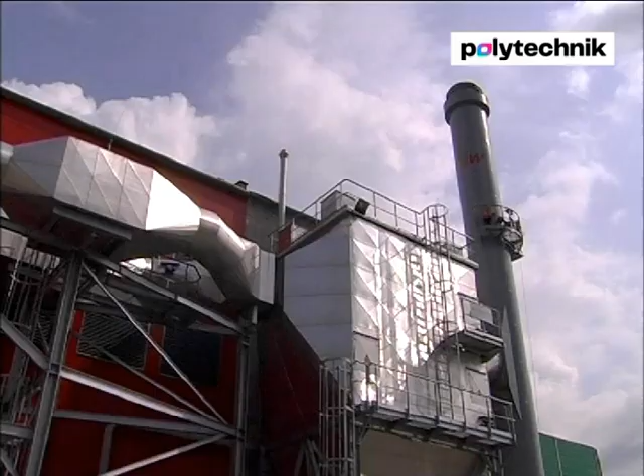Polytechnik has been using heat and electricity from the sun's energy stored in wood for over 40 years. More than 2,500 Polytechnik facilities have proven that it's capable of meeting the spectrum of customer requirements and covering the range of fuels on offer.

These facilities have been constructed within industry as a whole, in the timber industry, municipalities, market gardens and the food industry, among others.

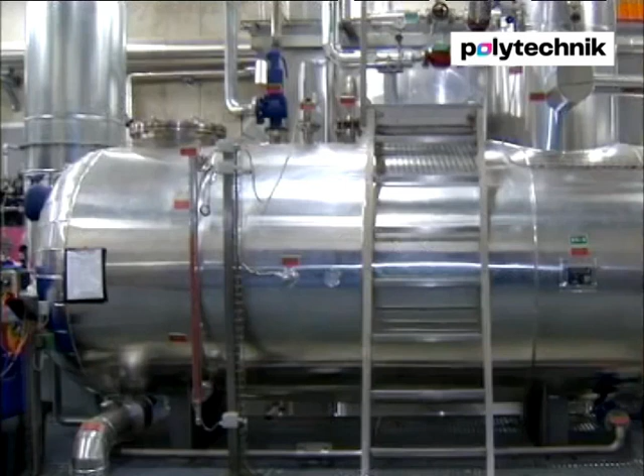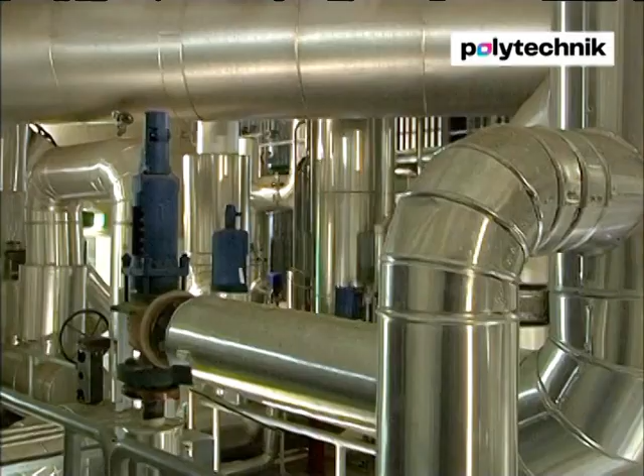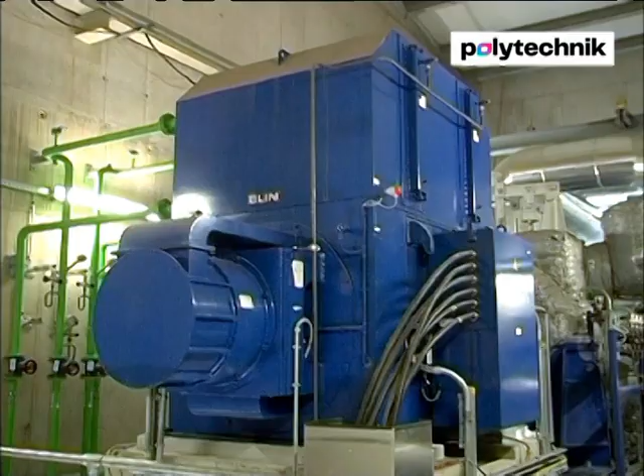They can be used for heating purposes and for process heat, as hot water or high-temperature boiler plants, and for the production of electricity, either via a traditional steam boiler or in conjunction with a thermal oil boiler and ORC process. The thermal power range of a single boiler currently lies between 300 kilowatts and 30,000 kilowatts, and the electrical power range of a single turbine between 200 kilowatts and 20,000 kilowatts.

Biomass-generated heat in automobile production.

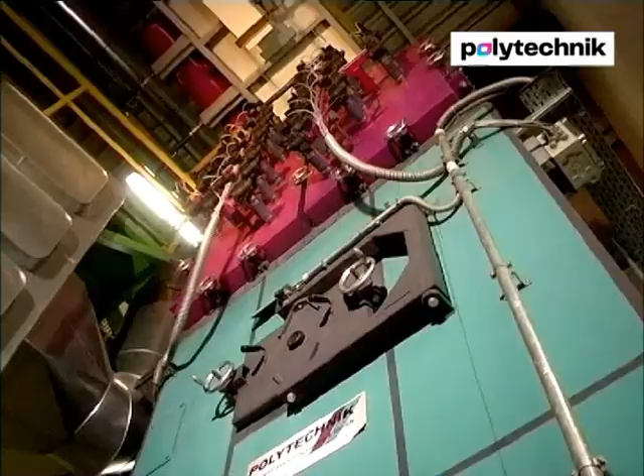Neoplan buses are known the world over. Two wood chip boilers use wood chips and waste wood from the operation to produce heat for all the company's buildings all year round.

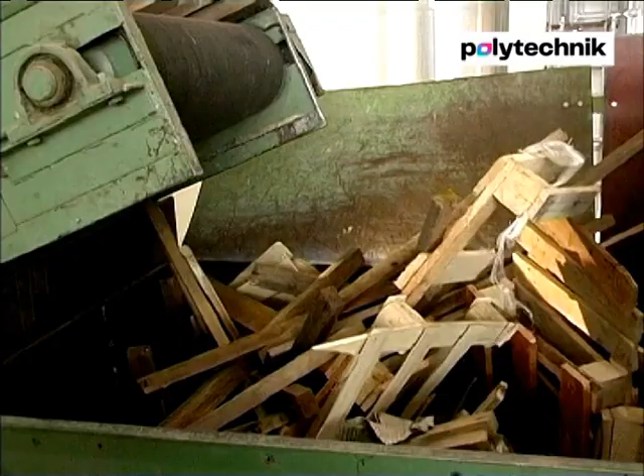The food industry and hospitals.

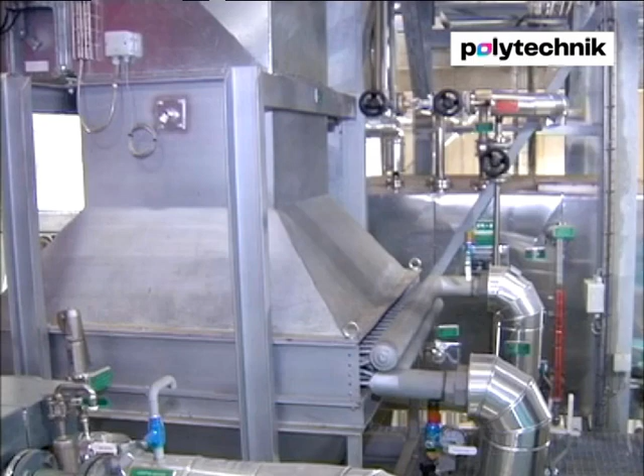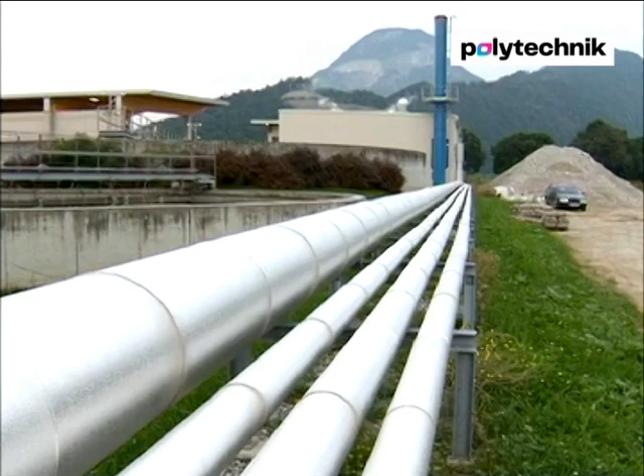Tirol Milch, a cooperative of 5,000 milk suppliers, has been using a Polytechnik boiler system since 2008. The boiler, with a thermal power output of 6 megawatts, generates steam for the production of milk products throughout the year. The fuel comes from the local woods and is supplied by the surrounding forest farmers.

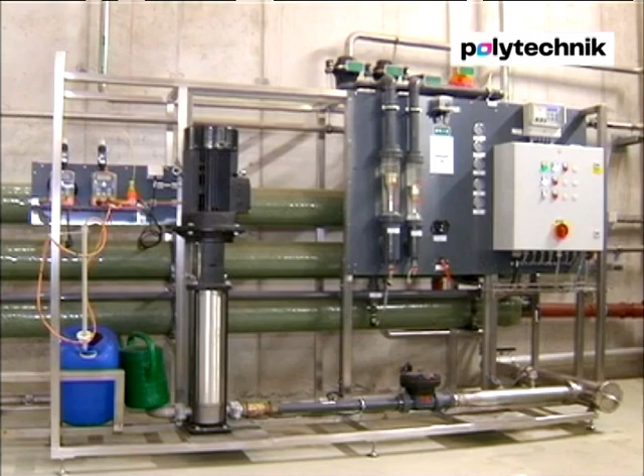Facilities in the food industry require dust-free structural integration. Polytechnik has solved this issue, for example in this facility, which provides heat for the hospital in the Polish town of Gorlice.

Heat from horse bedding.

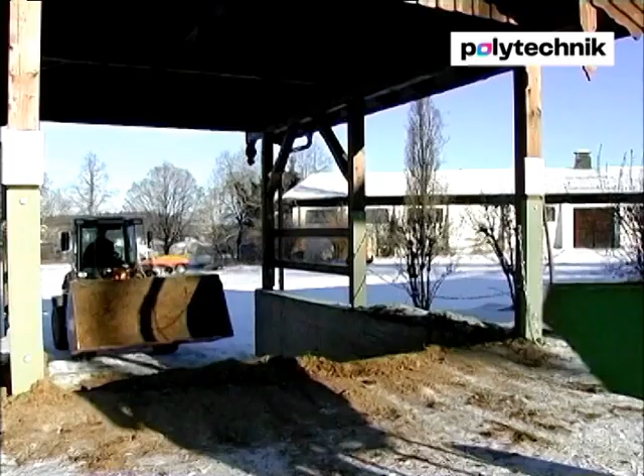Horses are not only a source of pleasure, they also produce dung which can be used to generate energy, as proven by the Polytechnik facility in the Bavarian town of Gut Ising. Horse bedding is mixed with wood chips to supply heat to residential buildings, the hotel and school.

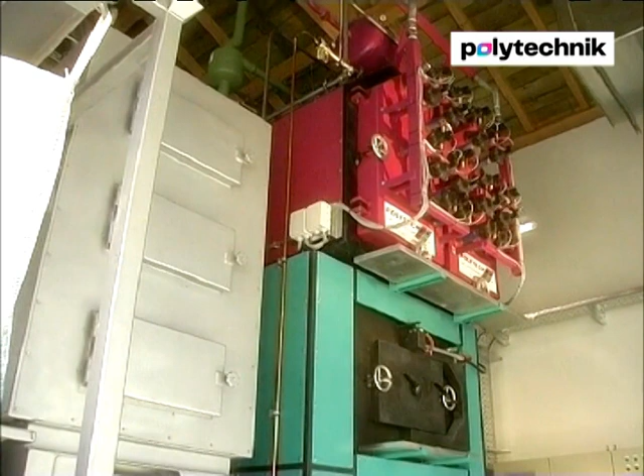In partnership with municipal supply.

The Naturwärme Reit im Winkel biomass boiler plant, in the well-known winter sports resort of Reit im Winkel, delivers heat all year round. The Reit im Winkel plant shows that the town and its municipality can rely on Polytechnik facilities.

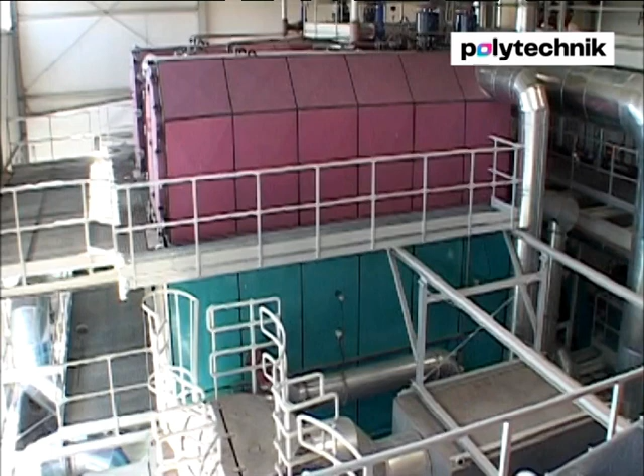Just like in this district heating plant in the Polish town of Pisz, which has 4 Polytechnik boilers.

In partnership with forest owners.

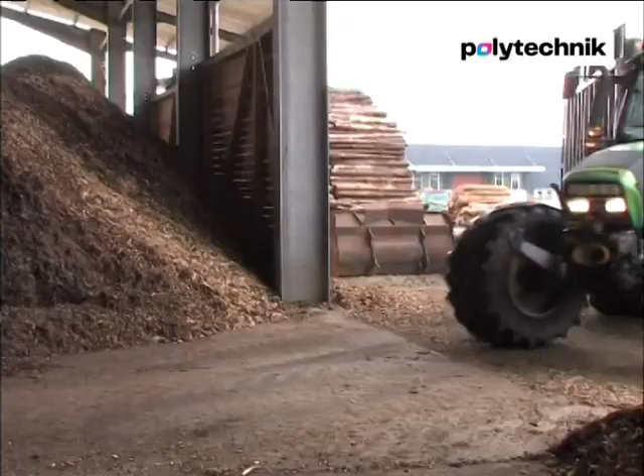It makes economic sense for forest owners to be able to extend the value-added chain of their fuel supply to include the delivery of heat and electricity.

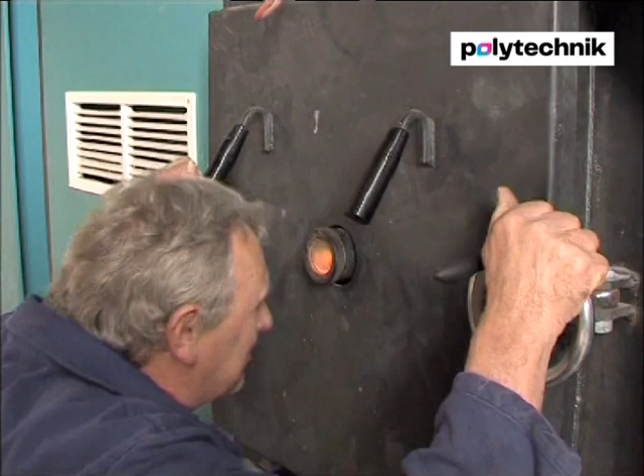It is important, such as here in Jardorf with a CHP ORC process, or in Sonthofen with a high-pressure hot steam CHP plant, that the operators of these facilities have access to know-how and reliable technology, such as that provided by Polytechnik. In partnership with the electricity industry.

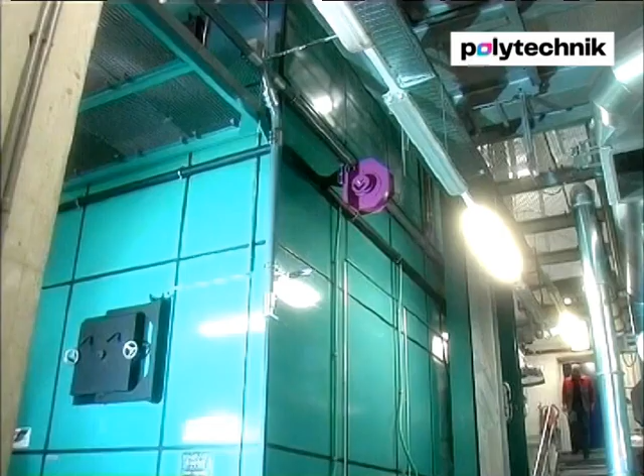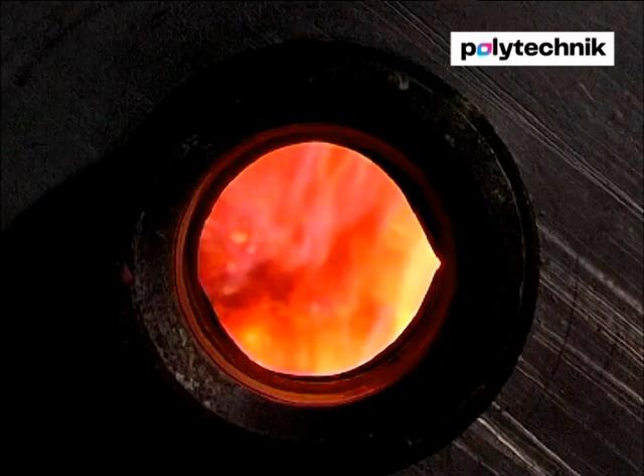Biomass heating plants generate electricity from biomass and therefore form part of the solution within the framework of an effective, climate-conserving and sustainable energy economy. The cogeneration of heat and electricity from biomass is therefore an important additional step towards energy efficiency.

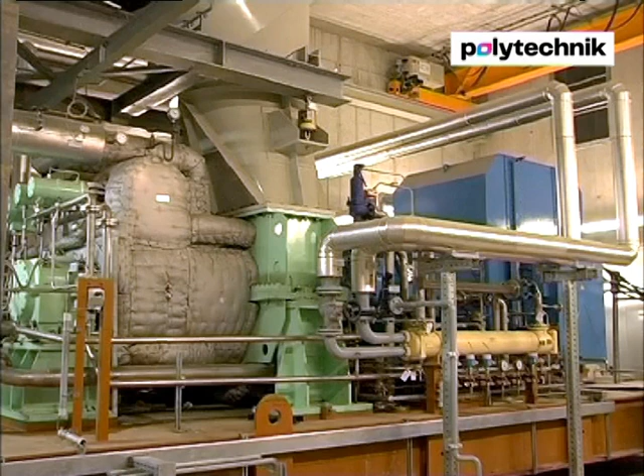Polytechnik is able to provide groundbreaking evidence of this in the form of reference plants. These 3 facilities in the Waldviertel region of Lower Austria, each with two 10.7 megawatt steam boilers, generate a total of 120 million kilowatt-hours of green electricity per annum.

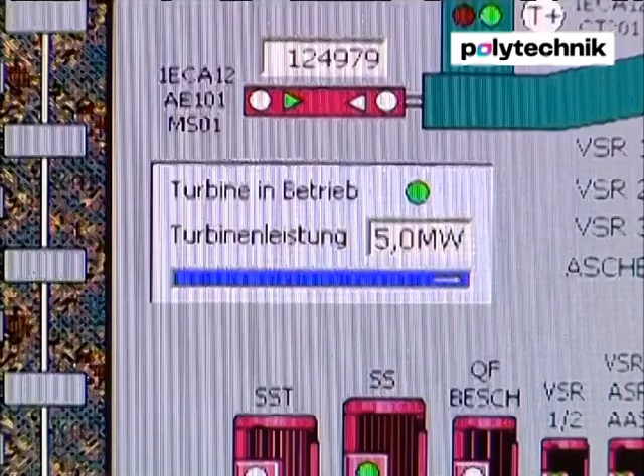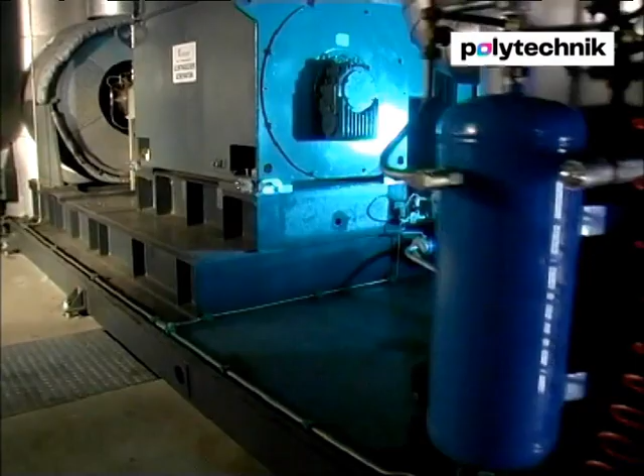Tiroler Wasserkraft AG also uses two Polytechnik boilers. In conjunction with an ORC plant, these generate 5 million kilowatt-hours of green electricity each year. The heat generated by the production of electricity is used to heat the region of Längenfeld in Ötztal and the entire Aquadome thermal baths. This marks the end of the road for the fossil fuel era here.

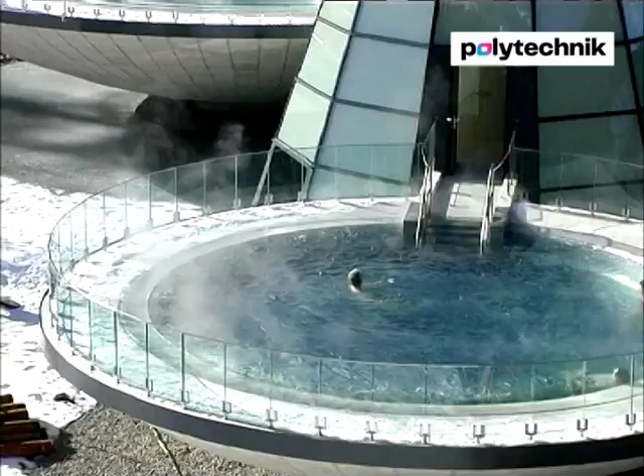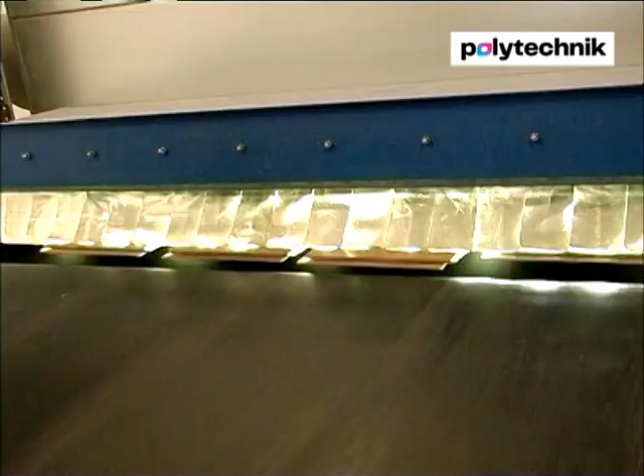In partnership with the timber industry. Polytechnik's combustion plants are used in industrial and wood processing operations, as well as to supply heat in local and district heating networks.

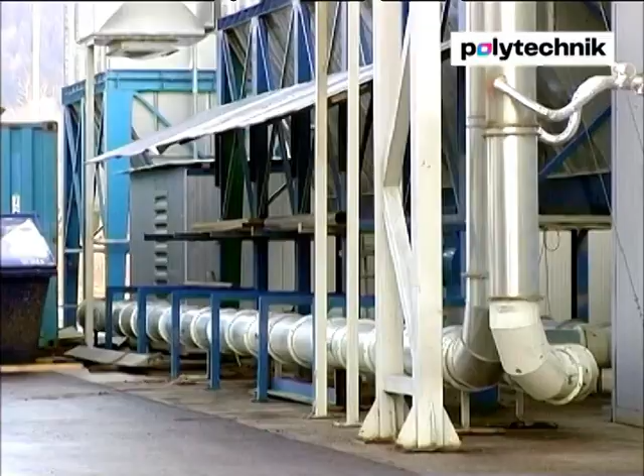Polytechnik also offers fuel treatment and reduction services on request, and spark extinguishing systems and extraction and filtration equipment for large-scale projects.

Polytechnik has grown to work in partnership with the timber industry across Europe, whether in Poland, the Arctic Circle, or the south of France.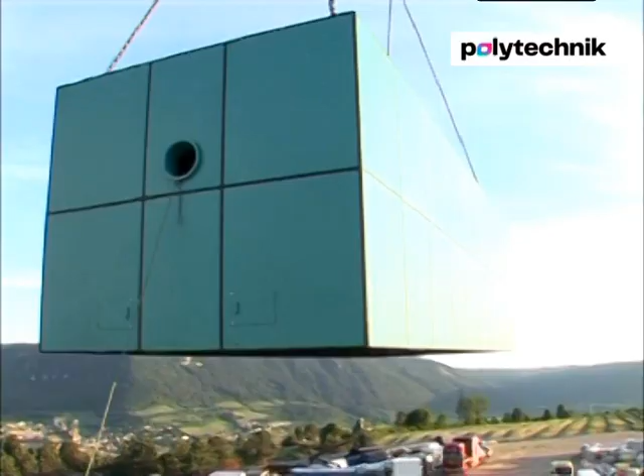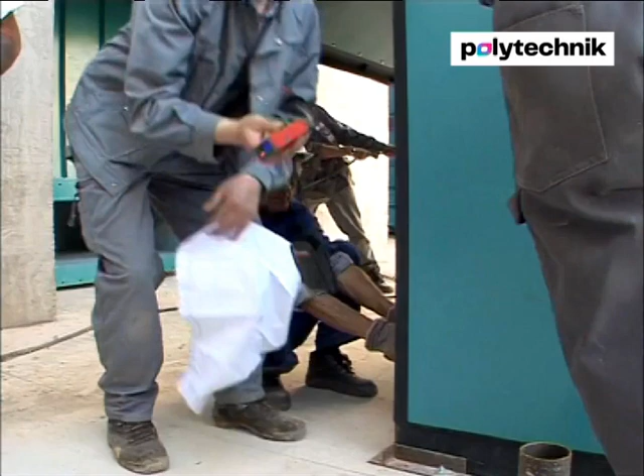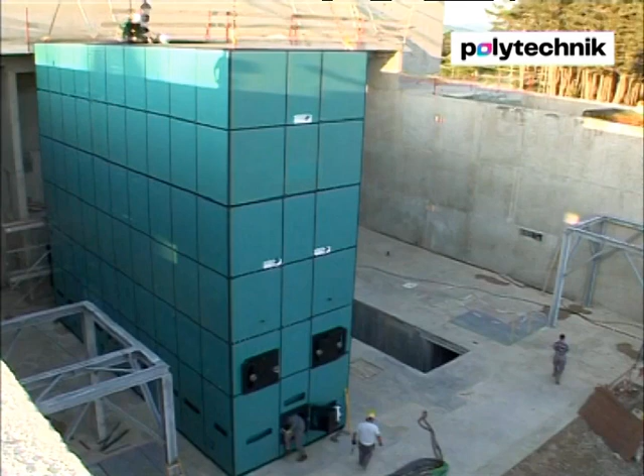This project for the production of heat and green electricity is based on 3 biomass boilers. Each of the 2 boilers with an output of 16.5 megawatts generates 26 bar of high-pressure steam to serve the CHP facility. The steam powers a 7.5 megawatt generator via the turbines, thus feeding the grid with more than 60 million kilowatt-hours of electricity. The use of biomass fuel means this project saves more than 168,000 tons of CO2.

Expertise based on more than 40 years of experience.

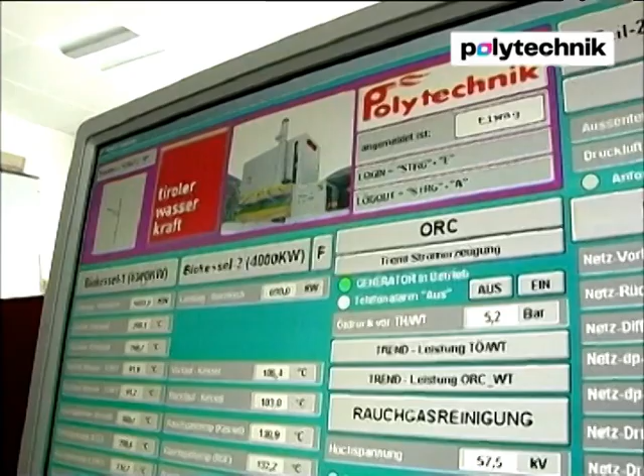All Polytechnik facilities are fitted with the most up-to-date control and regulation technology. The fully automated control and regulation of the entire biomass combustion plant is carried out by a programmable Polytechnik control memory, a Siemens Simatic S7. The visual display and control software provide a convenient overview of all the relevant facility data.

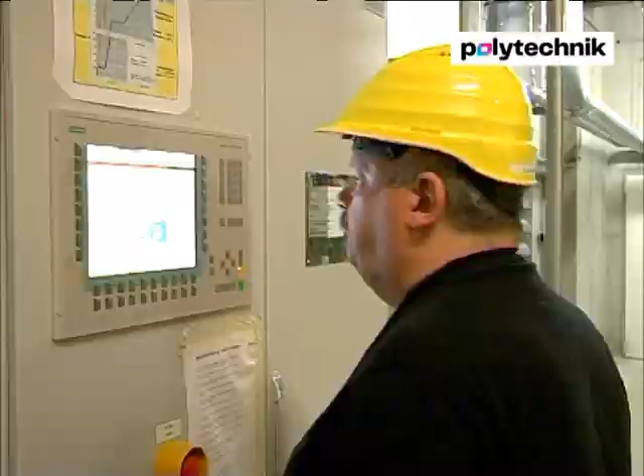Polytechnik customers are able to build on more than 40 years of experience in the construction, research and development of combustion and control engineering.

This is where the design engineers create the models for future facilities. This is where optimization takes place, and this is where it is clear that the boiler technology also forms the basis of and defines subsequent cogeneration building complexes.

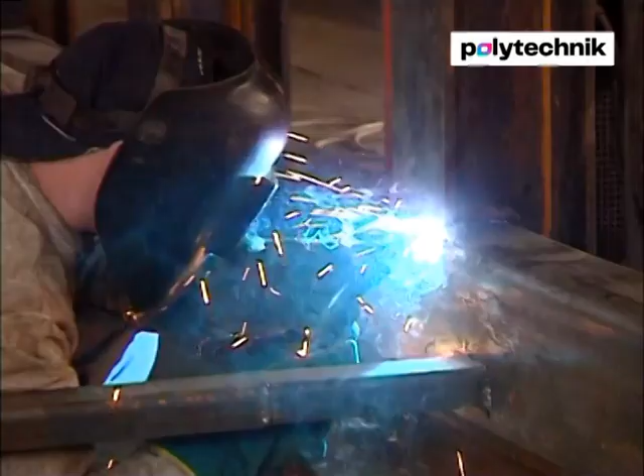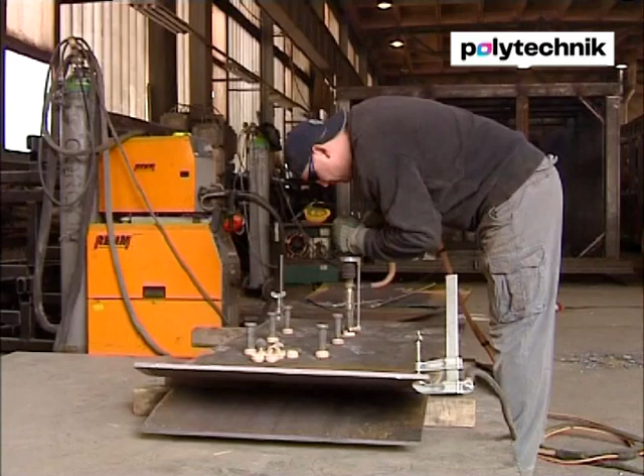In recent years, Polytechnik has been able to make strides in its organizational development and has taken decisive steps towards its customers' needs. The Polytechnik Group, with its head office in the Austrian town of Weissenbach, also has subsidiaries in Hungary, Switzerland, France, Poland, Russia, Romania and Belarus, and currently employs over 450 people. This means our customers can receive optimal advice and support in the run-up to and during the licensing process of a facility itself.

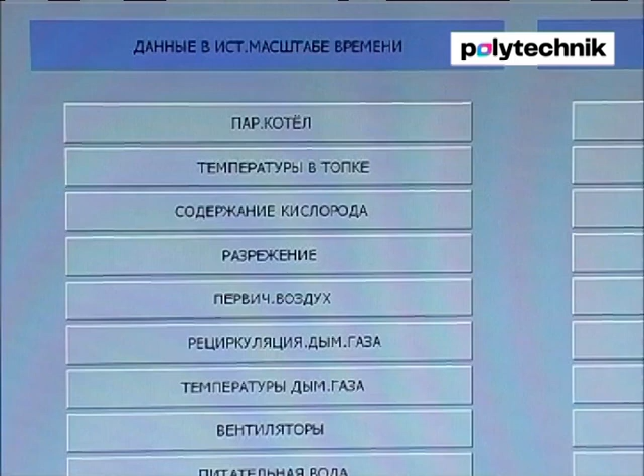"We're always there for our customers" is the Polytechnik motto, which is taken literally. This mission statement accompanies our facilities' personnel around the clock and during the everyday operation of those facilities. The Internet and our regulation system make it possible to communicate direct and online with personnel and with the on-site control, to maintain the facility and, when necessary, to control it remotely.

Solid training is the best means of preventing operating error and downtime, and the associated financial penalties. We offer our employees and our customers regular training sessions within our company. The safety of the operation and its personnel, as in this example, is always our top priority.

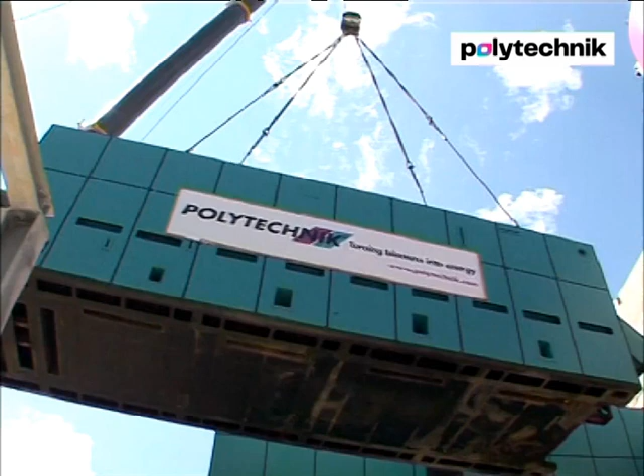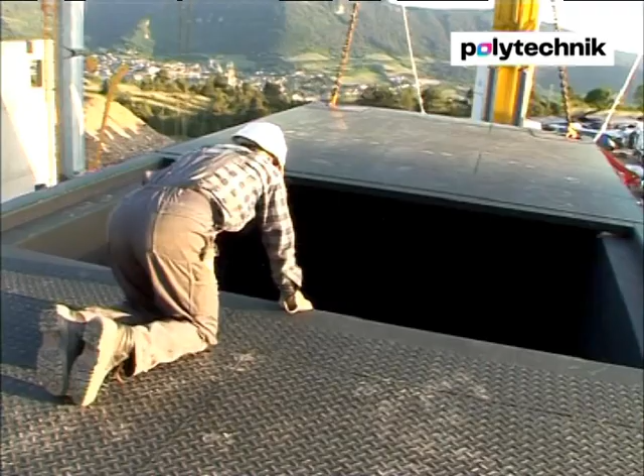Polytechnik not only supplies everything relating to boiler technology, including control and regulation units, the company is also able to provide turnkey heating plants and biomass power plants. From the planning, construction and installation to the handover of the key. This is done right across the world. Here is an example from France. And right on time.

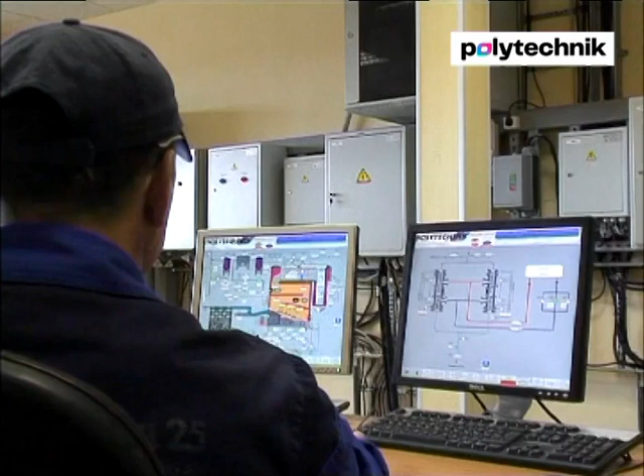Polytechnik International. The Liesozavod 25 biomass heating plant is perfect proof that Polytechnik has successfully positioned itself on the international scene as well as in extreme climates. Here in the Arctic Circle, Polytechnik has installed one of the most modern biomass heating plants in Russia.

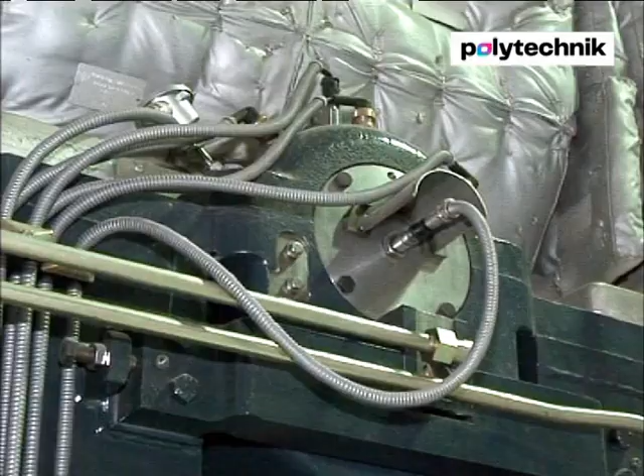The Liesozavod 25 biomass heating plant is fitted with two 7.5 megawatt high-pressure steam boilers and generates 20 million kilowatt-hours of electricity per year. The residual heat is used as process heat for drying wood and for the district heating system.

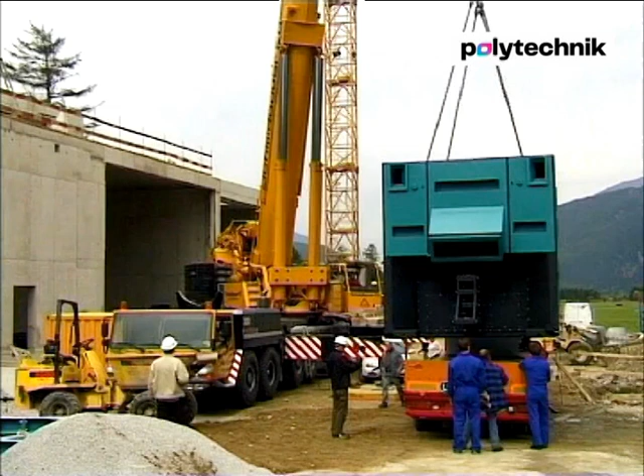Polytechnik is a global specialist in construction, production and project management, from small-scale biomass heating plants to large-scale biomass heating plants, for the generation of heat and electricity.

Polytechnik is a modest part of a large global project, using the sun's energy stored in wood. The project for economically efficient and sustainable climate protection.